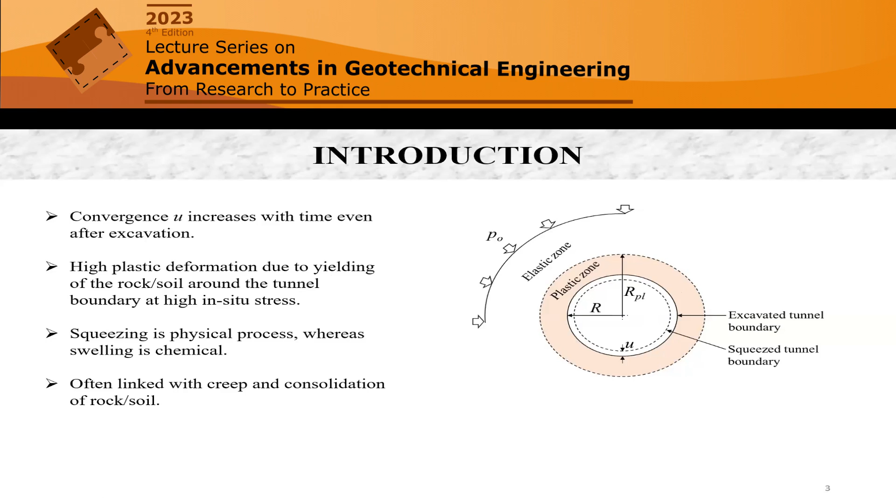The primary reason for squeezing is high plastic deformation or yielding of the rock or soil around the tunnel boundary. But since this is a time-dependent deformation, squeezing is often related to physical processes such as consolidation and creep, and it is different from chemical swelling. In swelling we have high volumetric deformation and it is a chemical process, whereas in squeezing we have negligible volumetric deformation and it is a physical process.

To give you an idea about how to quantify that weakness, it can be expressed in terms of the competency ratio FC, which is the ratio of the compressive strength of the rock mass to the vertical stress, or it can be the principal stress as well. In this case FC was 0.12, and from the literature it is quite clear that if FC is less than 0.5, then you are excavating in a squeezing ground condition.

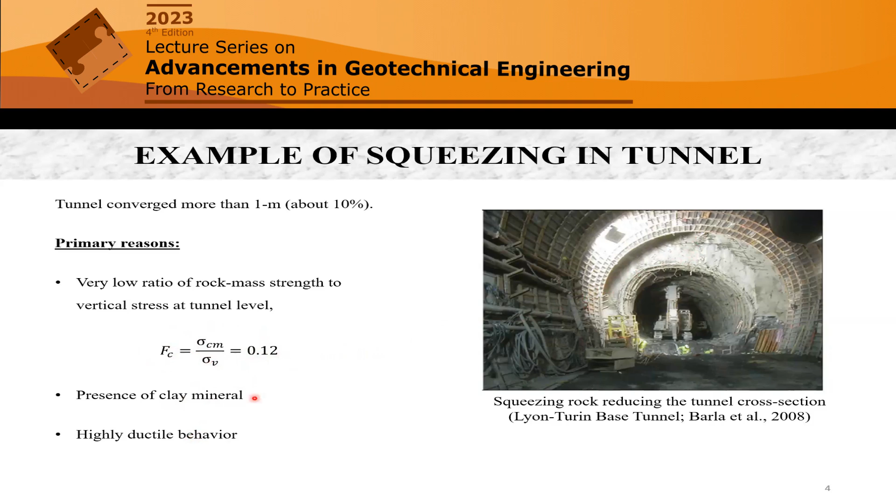Different definitions are actually based on the stress level that you are experiencing, the different convergences that you can have, the different tangential strain, the condition of the rock mass, and mineralogy. So there are different definitions of squeezing. But based on the ISRM suggested methods, the definition of squeezing is large time dependent deformation in a clay rich rock ground at a very high in-situ stress.

Over the years, all the approaches that have been proposed can be broadly classified based on the ground material in which squeezing is associated with a clay rich rock or soil. It has also been associated with the rock mass quality Q system, where if Q is less than a certain value, the tunnel will be in a squeezing ground condition. Then there are factors like the competency ratio, which I've already explained, and classification based on critical stresses and strain, which I've already discussed.

For example, if you have an overburden greater than 500 meters, then your tunnel is in a squeezing ground condition and the ground maintains its continuity. If tangential strain... these are just examples. That's how squeezing was actually studied in the past.

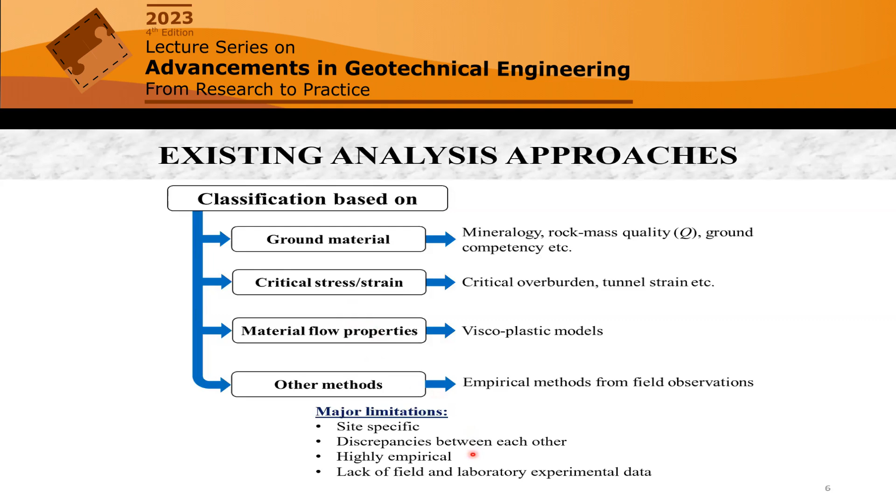Then we have models based on material flow properties, for which we have viscoelastic and viscoplastic models, and other criteria based on field observations and empirical correlations. But the major limitation of all these criteria is that they are either site specific, hold discrepancies between each other, are highly empirical in nature, and are derived from limited field and laboratory experimental data.

In this lecture, I'll be talking about two approaches: the first is a preliminary estimate, and the second is a quantitative estimate. In the preliminary estimate, we say that squeezing is solely associated with the yielding of the material. We are not discussing any model or any creep consolidation of the material; we are saying that the material has yielded, and the critical parameters are overburden, strength, and elastic properties of the material.

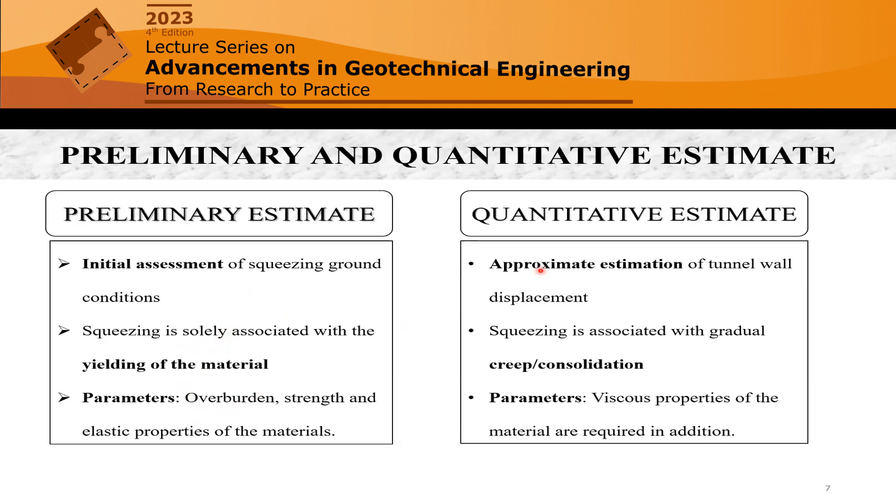Whereas in the case of quantitative analysis, we are actually studying the creep and consolidation properties of the material, for which we have a viscoelastic or viscoplastic model. So first, we'll start with the preliminary estimate.

This study was done back in 2018. In this study, we combined a few existing theories of tunnels excavated in clay rich rock. The first was given by Terzaghi, who associated squeezing mainly with the presence of clay minerals in the rock. The second theory was proposed by Peck in 1969, where he proposed a stability number N, which is the ratio of sigma V to the undrained shear strength of the rock mass.

Sigma V is the total vertical stress, so this was a total stress analysis. If the value of N is greater than 7, then we'll have a high amount of squeezing, and as N increases, the amount of deformation within the tunnel, or the U convergence that we have studied, will increase.

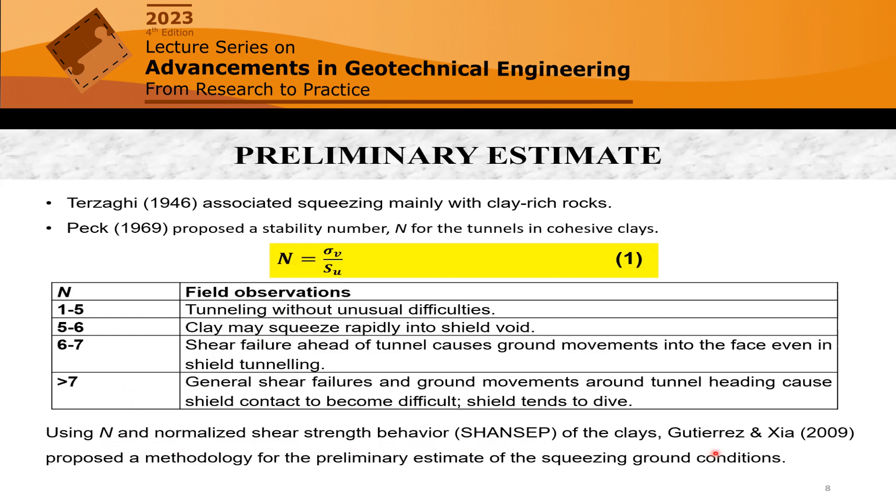Using this N and the SHANSEP model, which is a stress history and normalized soil engineering property model proposed by Ladd and Foot in 1969, Gutierrez and Xia in 2009 proposed a study for the yielding of the clay material around the tunnel boundary. They calculated a critical stress; if that critical stress is less than any of the major principal stresses at the tunnel location, then it is in a squeezing ground condition.

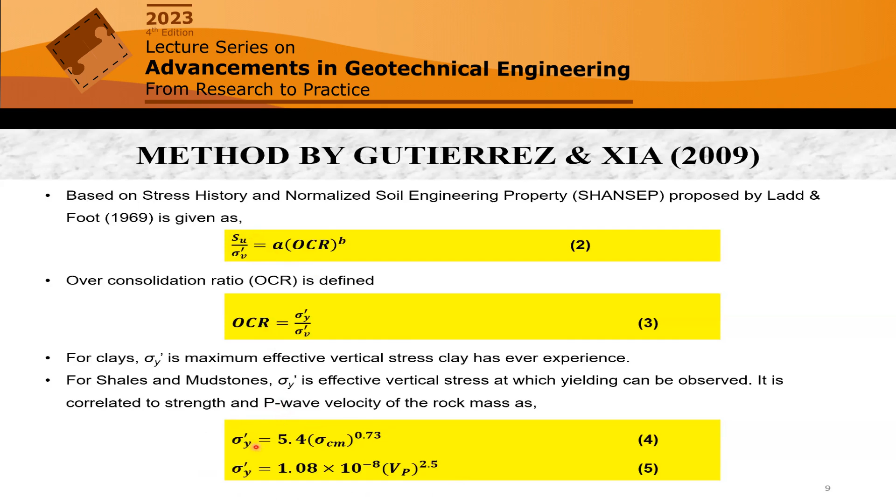But our focus was on clay rich rock, and we needed to determine equivalent parameters for a rock mass equivalent to the undrained shear strength of soil. For that, we used an experimental correlation in which we studied the UCS of the rock mass with the stress at which yielding was observed. These two equations, 4 and 5, provide sigma y prime, which is equivalent to Su, the stress at which yielding can be observed in the rock mass.

Finally, we combined these equations and proposed an equation to calculate the critical stress at which squeezing can be observed. So if the effective major principal stress at the tunnel location is greater than sigma critical calculated by equation 6, then we say that the tunnel is in a squeezing ground condition. But again, the squeezing is not quantified.

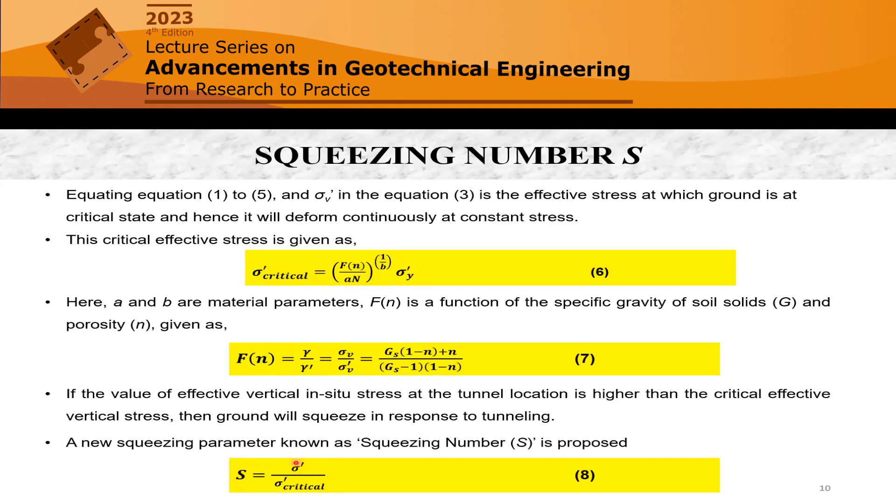So for that, what we did, we proposed a squeezing number S, which is actually the ratio of sigma prime to sigma critical. Sigma prime is the effective major principal stress at the tunnel location, and sigma critical is calculated by the study. So we wanted to further explore what S represents.

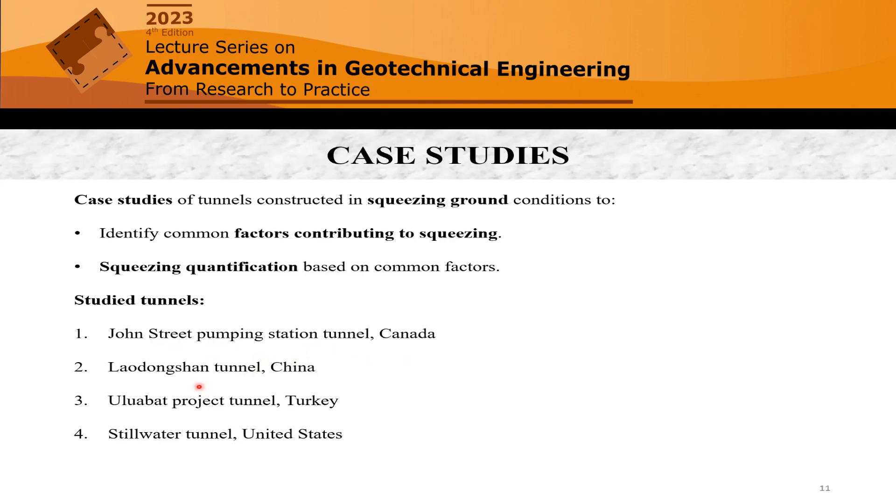So for that, we carried out a case study of 4 different tunnels that have experienced squeezing in the past. The first one was John Street Pumping Station Tunnel in Canada, then Laodongshan Tunnel in China, then Uluabat Project Tunnel in Turkey, and then Stillwater Tunnel in United States.

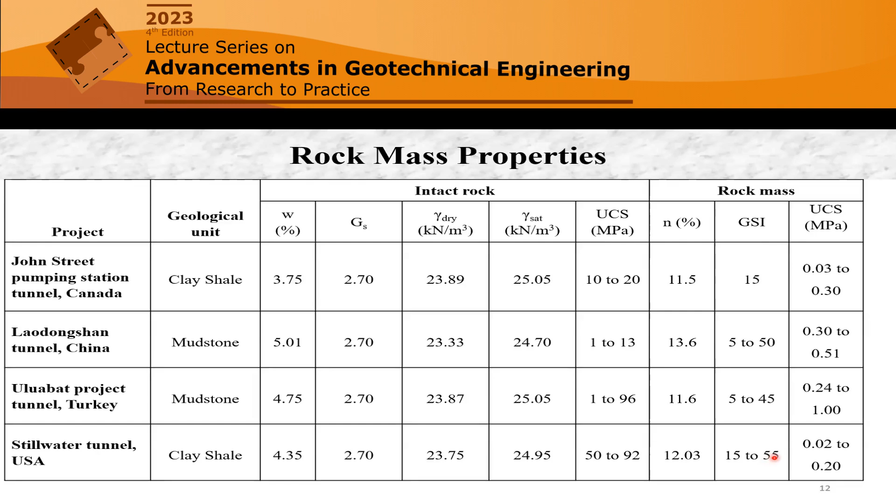So these are the rock mass properties of the 4 different tunnels, taken from different studies. You can clearly see that the GSI, geological strength index value of the rock mass, only crosses 55 in case of Stillwater tunnel for a squeezing ground condition. It's close to 55, otherwise it's very low — a very poor rock mass. It's basically between class 3 to class 4 rock mass, or in some cases class 2 rock mass.

So first about John Street Pumping Station Tunnel. Originally the tunnel was built in 1925, but in the 1980s they proposed an extension of a 1.5 diameter tunnel to carry water. The tunnel is located on land reclaimed from Lake Ontario, and the geology of that area contains a thick sequence of thinly bedded or laminated shales.

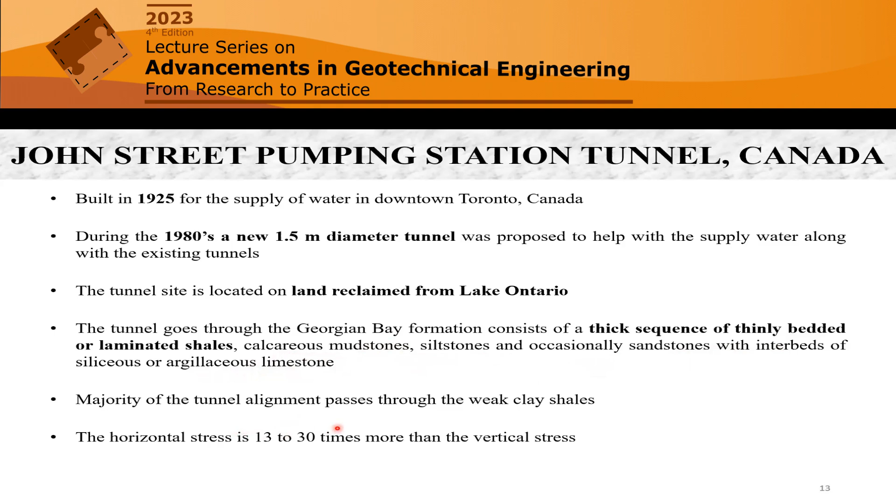In between we also had calcareous mudstone, siltstone, and occasionally sandstone with interbeds of siliceous or argillaceous limestone. So basically we had a clay rich rock, shale or mudstone, at that location. We selected a few critical cross sections, but this tunnel was excavated at an overburden of 15 to 30 meters. The major issue was that the horizontal stress at that location was 13 to 30 times the vertical stress, which was the primary reason for the squeezing.

So for the 17 critical cross sections of that tunnel, we calculated sigma critical as proposed in our methodology at each of the 17 critical cross sections. We also observed the major principal stress, and then critically identified the sections at which S was actually greater than 1, and compared with the field observations.

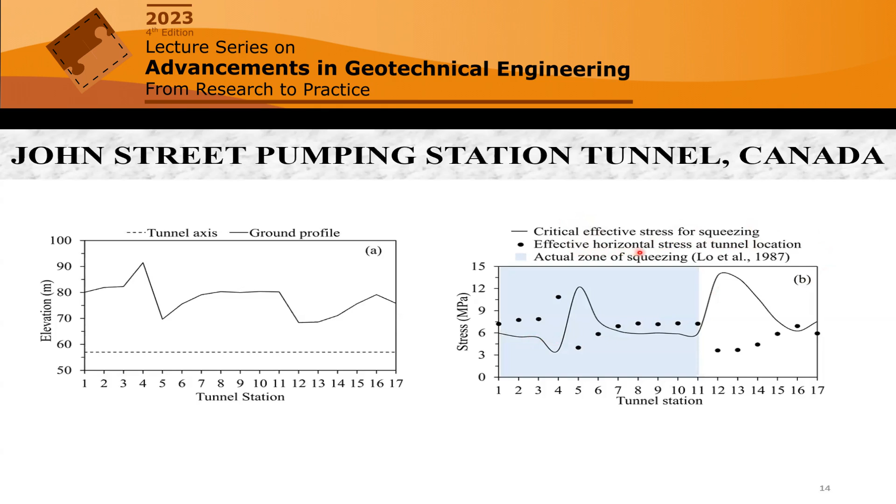Next was Laodongshan tunnel in China, and this tunnel actually experienced massive squeezing in the early stage of construction. Even the steel ribs installed on site failed after a few days of installation. This tunnel was around 7.5 kilometers long and was excavated at a maximum overburden of 370 meters, and the rock mass ranged from type 3 to type 5, with squeezing mostly observed in rock mass of type 4 and type 5.

Again, the rock mass was a mudstone rock mass, very incompetent, with UCS ranging from 1 megapascal to 13 megapascal. If you recall the competency ratio parameter, which is the ratio of sigma cm to sigma v — in this case we have an overburden of 370 meters, and UCS between 1 to 13 megapascal. Even assuming an average value of roughly 6 or 7, the competency ratio is less than 0.5. So squeezing was expected in terms of the competency ratio.

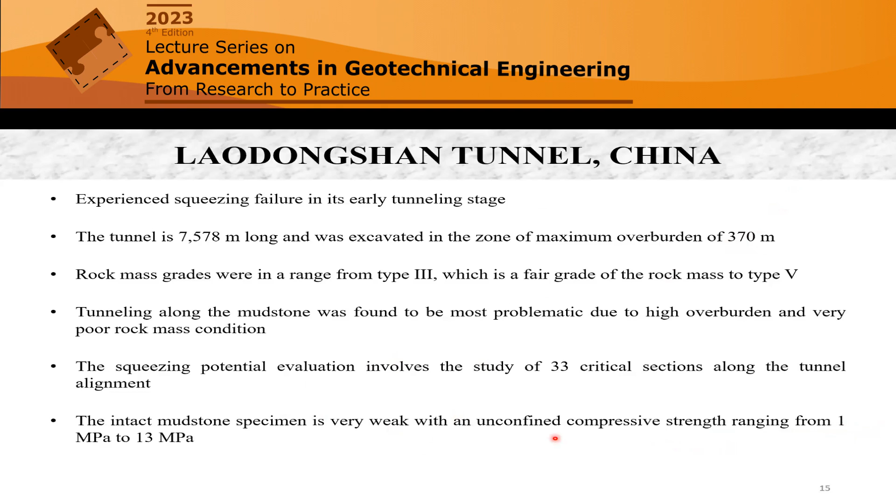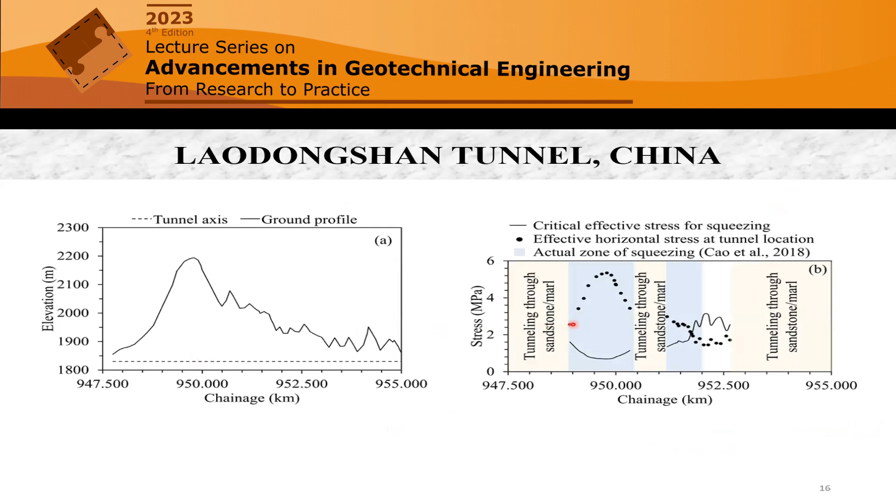But again, we did a similar analysis as in the first project. We selected a few critical cross sections where squeezing was observed and mudstone was present, since this tunnel was excavated in mudstone as well as through sandstone, as you can see in this plot.

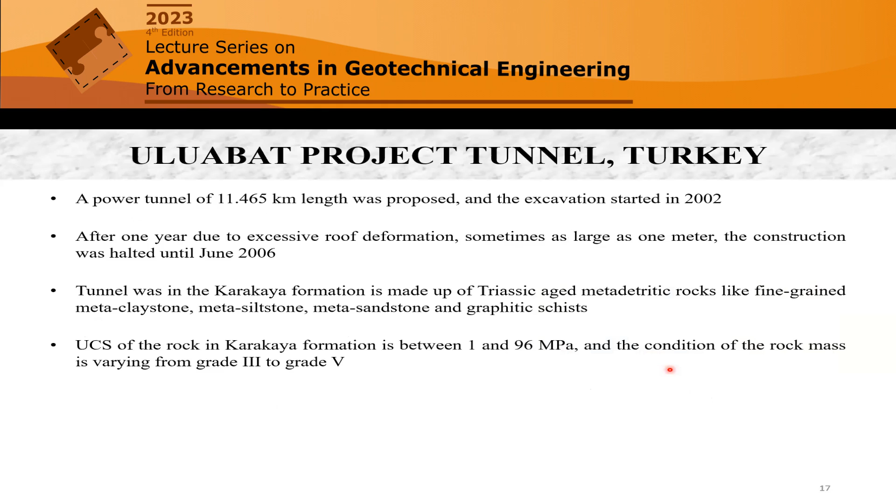The third project was the Uluabat project tunnel in Turkey. Again, we did a similar kind of analysis. In this case we also had claystone, which is another clay rich rock, and we performed a similar analysis.

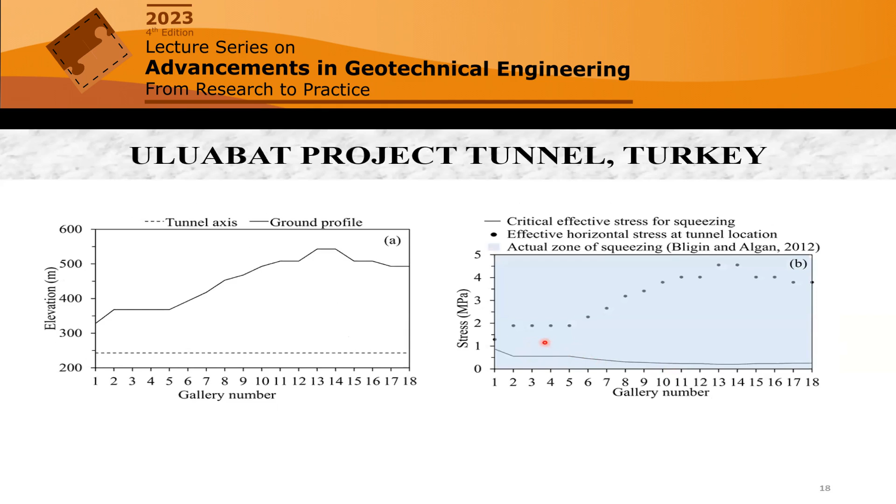In this case, all the points we selected had actually experienced squeezing, and our model was also predicting that. But the value of the squeezing number S was different, which we'll discuss in the coming slides.

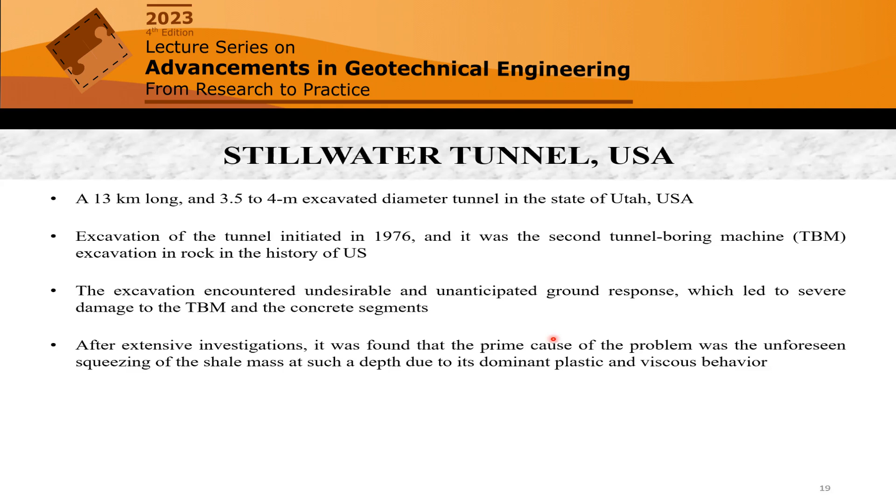The third one was the Stillwater Tunnel in the United States, a 13-kilometer long tunnel in the state of Utah. This tunnel was also excavated in clay-rich rock and experienced squeezing. In this case, the literature reported instances of light squeezing and moderate squeezing at different cross sections.

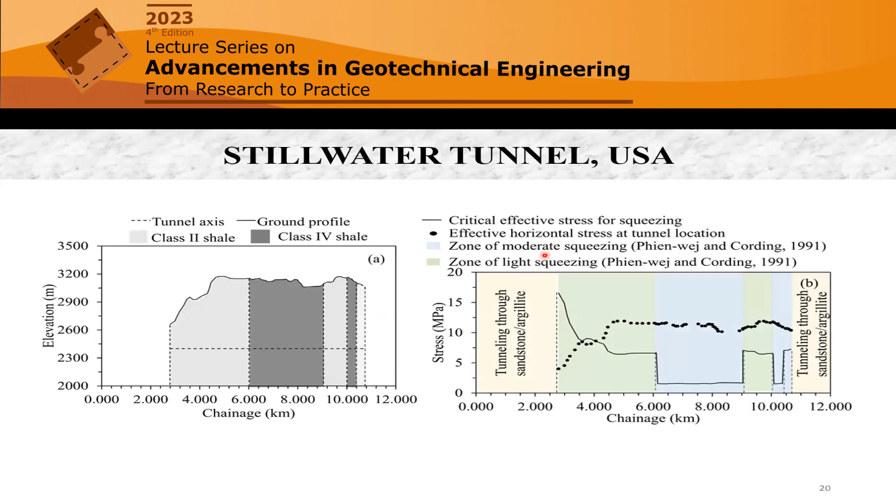This was a similar kind of analysis, but finally we compared the squeezing number S obtained from all four different tunnels shown in this figure with the in-situ observations. For example, for John Street Pumping Station Tunnel, the squeezing number S was varying from 0.26 to 2.97.

Just to recall, if S is less than 1, we have no squeezing. But on site, it was observed that there is a moderate time-dependent deformation of the tunnel.

In case of Laodongshan Tunnel, the squeezing number was as high as 7.78, and there was a settlement of about 275 mm at the crown, and 402 mm at the horizontal level.

In Uluabat project tunnel, the S was around 22, and in that case we had a tunnel closure, or the ratio of convergence to the radius of the tunnel was around 14%.

In Stillwater tunnel, the S was comparable to the Laodongshan tunnel, around 7.55, and we had moderate squeezing in Class 4 shale.

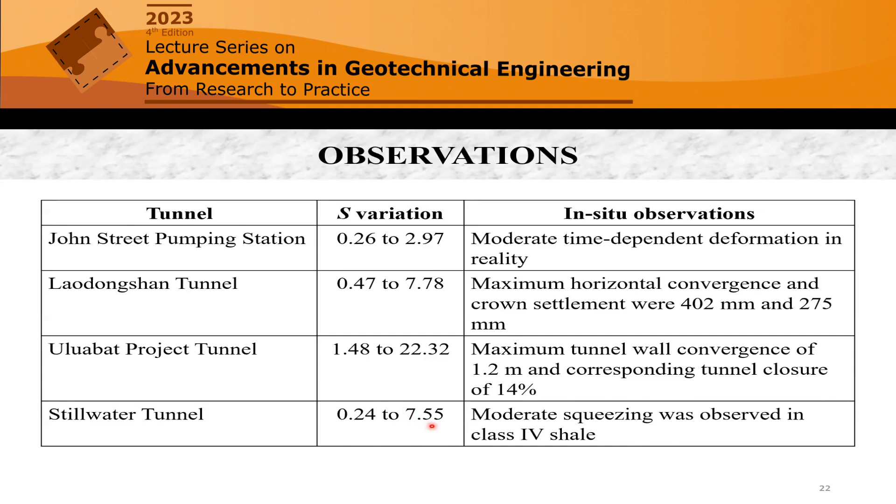So we combined our study with a study by Hoek and Marinos and proposed this table. If S is less than 1, then we have light to no squeezing and very few support problems. Likewise, as S increases, the amount of tangential strain in the tunnel will increase, so the support requirement will increase, and we can have unanticipated support issues.

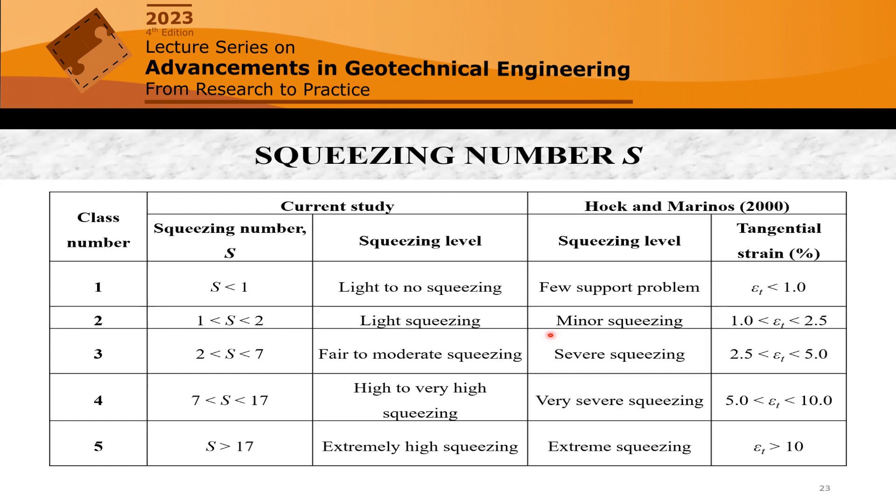This criteria actually provides a preliminary estimation of the tunnel alignment, and this is currently in practice. It has been adopted by the industry whenever excavating in clay-rich rock, be it sticky clay, mudstone, or shale. They are using this criteria to get a preliminary estimate of the amount of squeezing a tunnel can experience. Next, about the quantitative analysis.

For that, we developed a physical model test setup. This physical model test setup was developed during my PhD at Colorado School of Mines. It had three major components.

The first one was this true triaxial cell, marked as number 7. This true triaxial cell can accommodate a cubical rock specimen of 30 centimeters and can independently apply stresses up to 13 megapascals in all three directions.

For a mudstone, assuming the average unit weight, that is approximately 500 meters of depth, so it's simulating 500 meters of overburden. The rock material we tested had a UCS of 4.5 megapascals, so we were able to simulate a competency ratio of roughly around 1/3.

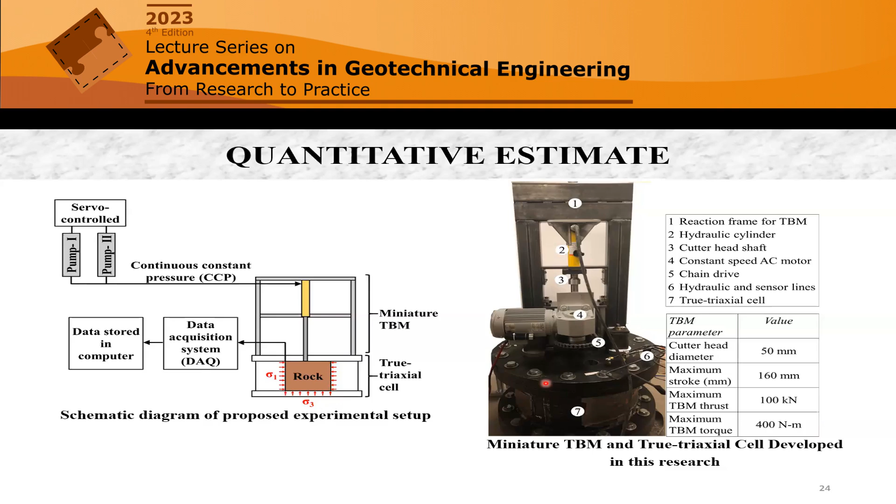This animation shows that while the cubical rock specimen is loaded in a true triaxial stress state, this miniature tunnel boring machine was excavating a cavity. Just to recall, the dimensions of this cubical rock specimen are 30 by 30 by 30, and the diameter of this tunnel was 5 centimeters.

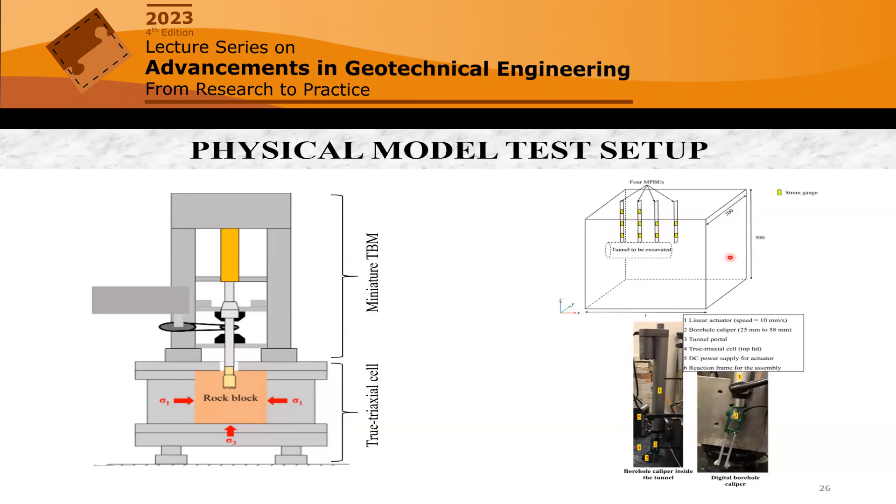The third important component, besides the true triaxial cell and the miniature tunnel boring machine, was the instrumentation and monitoring system. We had two kinds of instrumentation: one to measure the deformation around the tunnel boundary, and one to measure the deformation at the tunnel boundary. We wanted to monitor damages using an acoustic emission sensor installed on the surface of the cubical rock specimen, but unfortunately the attenuation was very high in a weak material like mudstone, so we were not able to do that.

So for that, we actually use a specially prepared synthetic mudstone. The motivation came from the preparation of a synthetic Melbourne mudstone in the laboratory, named Johnstone back in 1989. So we followed a similar process.

We mixed a small amount of cement into pulverized mudstone and prepared a synthetic mudstone in the laboratory. Then we did characterization and obtained cohesion and friction angle using the triaxial test and the unconfined compression test. We also obtained the creep parameters and fitted those creep characteristics in the Burgers model to obtain the Burgers model parameters.

We found that this synthetic mudstone had similitude with naturally occurring mudstone in terms of engineering behavior, showing a significant amount of creep, or simply, squeezing characteristics.

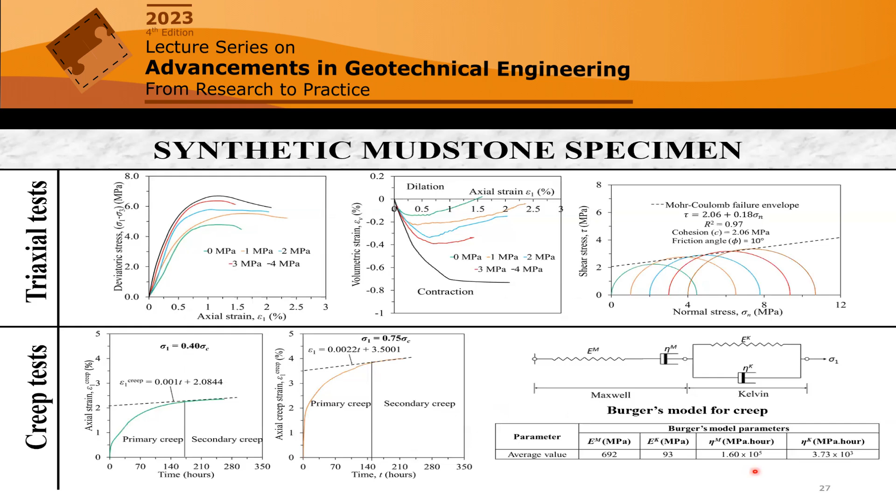Then we prepared a cubical specimen of this kind of rock and tested it in a physical model test setup, which had a true triaxial cell, a miniature tunnel boring machine, and instrumentation and monitoring.

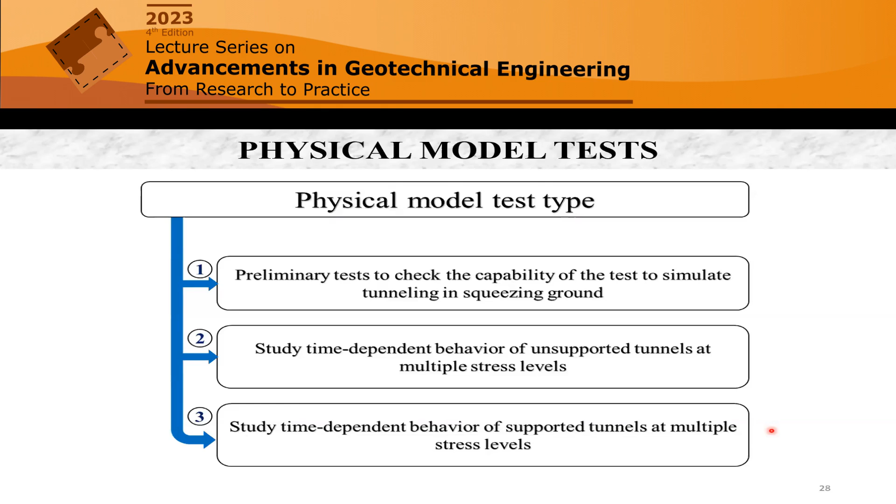We did three kinds of tests. The first was a preliminary test to check the capability of the test setup to simulate tunnels in squeezing ground. The second was a similar test, but with isotropic stress condition, on an unsupported tunnel. The third type of test was on a supported tunnel, with stress levels similar to test number two.

So I'll directly discuss the test on the unsupported tunnel. I'm not going to discuss the preliminary test.

In this test, we applied an isotropic stress P naught on the cubical rock specimen, then drilled a tunnel of diameter 5 centimeters and 160 long, and increased P naught in stages. You can see the ratio of P naught over sigma c was increased in stages, and the time of loading for each stage was based on the onset of the steady state.

Now, what is steady state? In terms of creep, when the strains are linearly increasing with time, that means we've hit the secondary stage of creep, known as steady state. So whenever we observe the secondary creep, we move to the next loading stage.

We monitored the damages at the tunnel boundary using a borehole caliper, which provides the change in diameter of the tunnel with distance from the tunnel face. This borehole caliper was moving like this—it had a robotic arm, so with time it was monitoring the change in diameter at different locations.

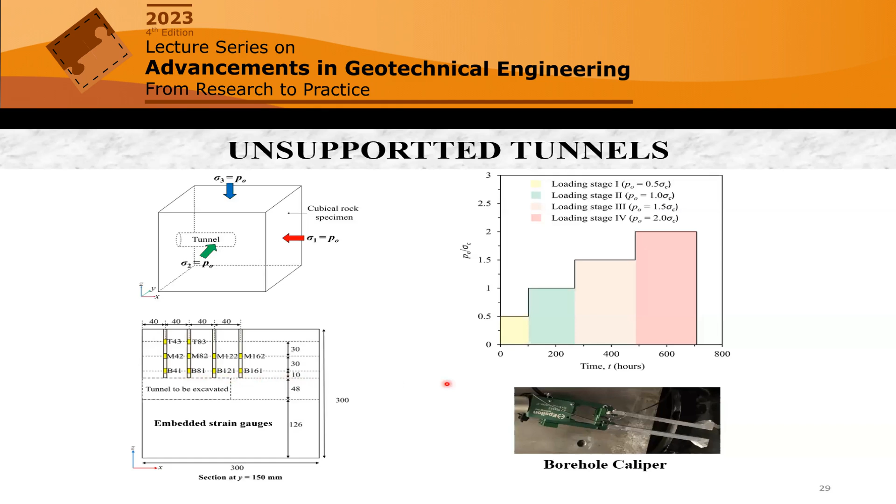That's why this kind of analysis was only qualitative in nature, not quantitative, because it wasn't providing the absolute value of the strain—it was just providing the trend of increasing strain around the tunnel boundary.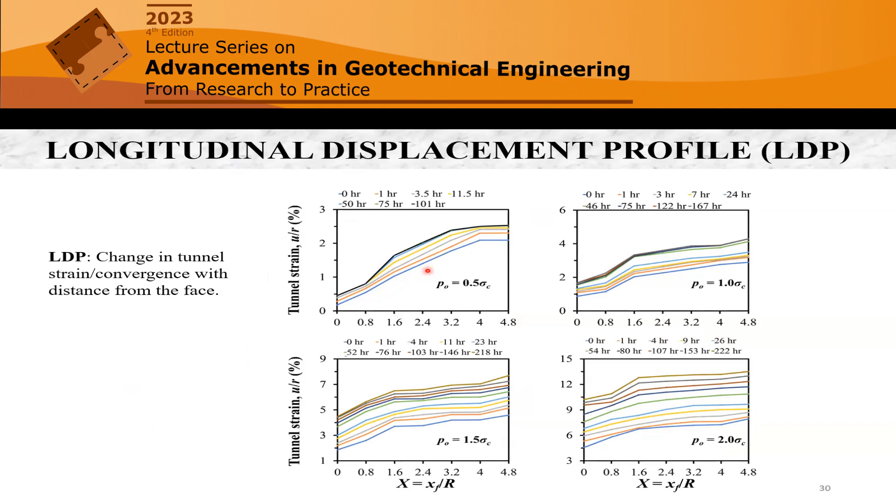But if we have the equation, we can predict the ultimate deformation that the tunnel can experience, and how much we have to over-excavate, or how much the stiffness of the support has to be increased. For this unsupported tunnel, this graph provides the variation of tunnel strain U over R with time at any tunnel cross section.

The best fitting equation was U over R equals A minus B times D to the power T. This gives the increase in tunnel strain with time, where D is a time-dependent parameter found to be constant, independent of everything, at about 0.98. Parameter A represents the ultimate strain of the tunnel. If you apply the boundary condition where time tends to infinity, U over R equals A; and at time t equals 0, U over R equals A minus B.

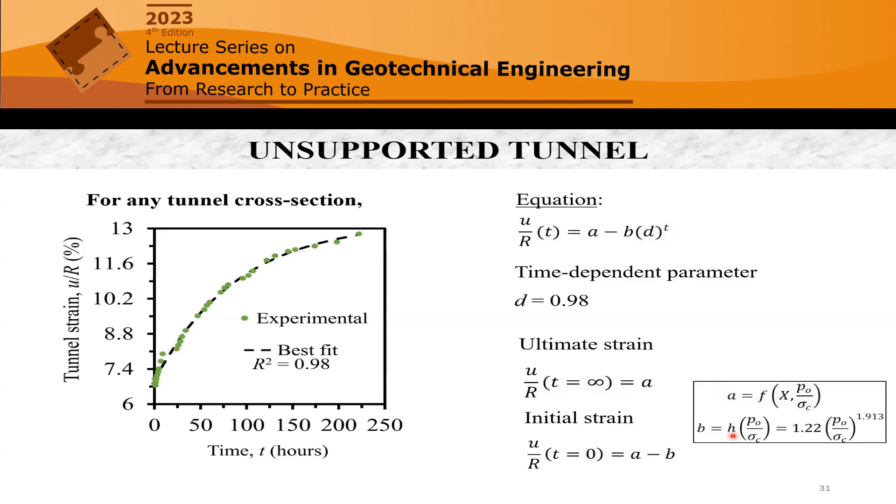The parameter A was found to be a function of capital X, which is the normalized distance from the tunnel face, as observed in the longitudinal displacement profile. It was also a function of P naught by sigma c, which is the inverse of the competency ratio. Whereas parameter B was found to be a function only of P naught by sigma c, and this was solely based on experimental observations.

The third type of test we did was with a supported tunnel. The test was similar to case one. The only difference was that we had a support element, which was an ASTM 6061 thin aluminum cylinder with radial strain gauges installed onto it at various distances from the face. These strain gauges, along with the borehole caliper, were providing the deformation at the inner face and outer face of the support system.

Similarly, we had a longitudinal support displacement profile in this case. The support displacement profile was found to shift upwards, but the increase in strain was not very significant. This kind of support system was actually very stiff, and what is stiff support and what parameter is used to define the stiffness of the support, we'll discuss in the coming slides.

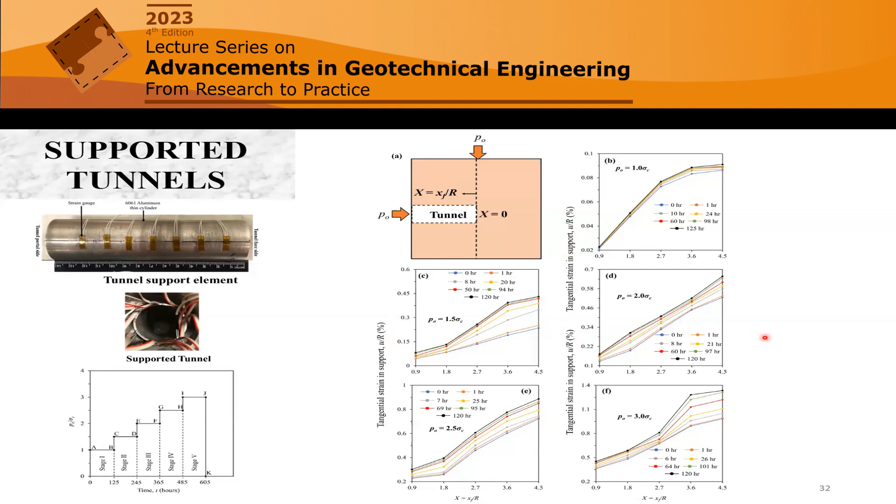The tunnel deformation can be defined by this equation at any cross section: minus Bs times D to the power T. Ds was again a constant of 0.98, whereas Bs and As, if we apply the similar boundary condition, a subscript S represents the parameter for a supported tunnel, whereas without the subscript it represents the unsupported tunnel.

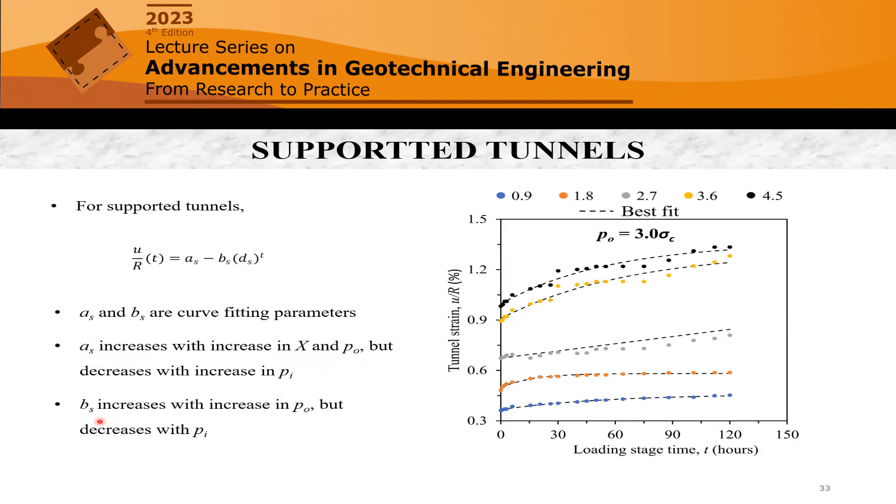As was found to increase with the increase in X, the normalized distance from the face, and with P naught, the applied isotropic stress, depending on the loading stage for this experiment. But it was found to decrease with Pi, the internal pressure that the support is providing. Bs was found to increase with P naught, similar to the unsupported tunnel, but it decreases with Pi.

We combined the observations of the two experiments and calculated the percentage reduction in tunnel strain because of the support installation. When we compared the two experiments for each loading stage, we observed that the support system was reducing the tunnel strain by approximately 96% for each loading stage. You can easily verify this by comparing all the longitudinal displacement profiles at the same loading stage, since we had a variable P naught by sigma c for each loading stage. So we had a 96% reduction.

Finally, from this analysis, we had this 6061 thin aluminum cylinder per ASTM standards, which had certain characteristics with respect to the stiffness of the ground. That characteristic was proposed by Einstein and Schwartz in 1979 in terms of the compressibility ratio C star. So what is compressibility ratio? It is expressed by this equation, and it basically provides the stiffness of the ground or geomaterial around the tunnel boundary, rock or soil, with respect to the stiffness of the support.

If the compressibility ratio is 0, the support is very stiff. If the compressibility ratio is infinity, that represents a no-support condition. So we compared our analysis result, the reduction in convergence because of support installation, with observations from the Laodongshan railway tunnel constructed in China, which we had discussed earlier in the preliminary analysis.

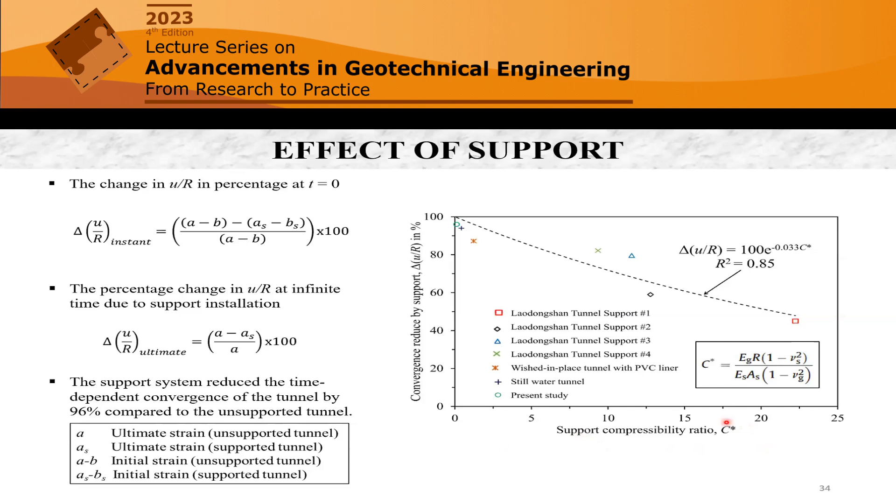So finally, we propose this equation. Let's say if we have an unsupported tunnel in squeezing ground condition experiencing tunnel strain of like 25%, and we want to bring that down to 2% or 1%, with this equation we can calculate the percentage reduction in delta u over r, and based on that select a support compressibility ratio, and design the thickness of the support system for a given material.

Just to conclude the study, we had a few tasks. The first was review and case study, and the major outcome was a parameter S, also known as the squeezing number, which can provide a preliminary estimate of the amount of squeezing any tunnel or underground construction project can experience. Then we proposed a novel physical model test setup that can simulate tunnel excavation in squeezing ground condition or at very high in situ stress, and this setup can be used for other applications as well.

Then we proposed preparation of a synthetic mudstone, which is very repeatable in nature since we were using standard materials. This kind of material can be replicated in any laboratory under any given condition, with the only requirement being to maintain the temperature and humidity.

Then we carried out the physical model test for a supported and unsupported tunnel, measuring convergence with time in squeezing ground for both cases. Based on analysis and synthesis of the test results, we derived an equation of the longitudinal displacement profile, U over R equals A minus B times D to the power T. With that equation, we can incorporate it into the convergence confinement method, providing a rational approach for design and analysis of tunnels in squeezing ground condition, and whatever criteria we had is experimentally verified.

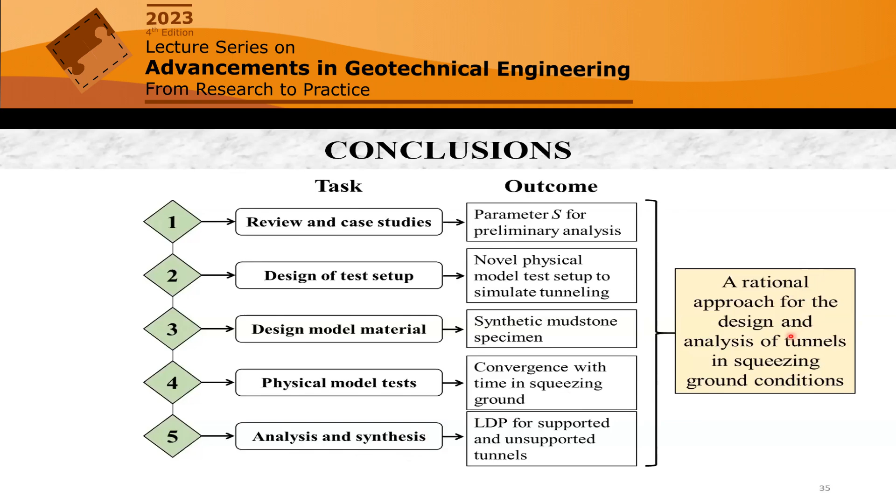So if you want to know more, these are the publications from this work.

Even though in this presentation I have limited myself to the selection of the support system, we did more work on squeezing, from calculation of the convergence of the tunnel, a theoretical model we discussed, to how this physical model setup was prepared. I have listed all the publications, so if you are further interested in reading more on this research, you can refer to these publications.